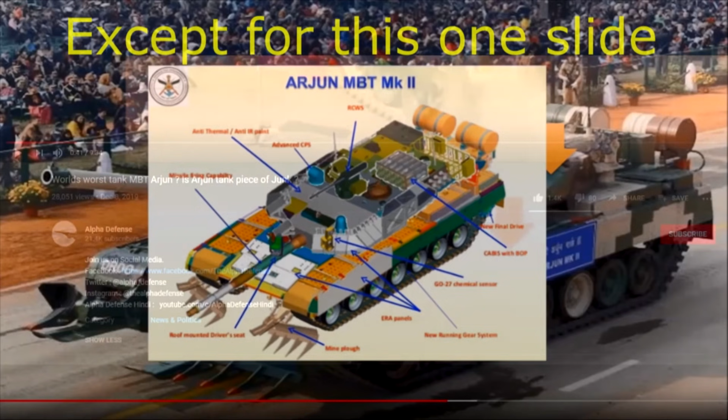Let's start with the timeline. The development of Arjun main battle tank started in the year 1972. It was right after the 1971 war, and the initial idea was to make a tank of 40 tons armed with a 105mm gun. This was the time when the world was moving towards larger guns. This was the pace of the changing world. India had to change the requirement, and thus a tank with a larger gun was designed. So the tank now in development wasn't the one which was conceptualized. Basically, it is a new tank. But the name of the project remains Arjun.

One of the most complicating factors was the changing environment, the threat perception, and advances in technology. This was a time when the world was changing very fast, especially in this segment. Between the year 1972 and 1996, the Indian Army changed its requirement 5 times. And every time there was a change in requirement, designers had to go back to the drawing board. It was only in the year 1996 that the Government of India decided to mass produce this tank. The mass production of this tank was done at the Heavy Vehicles Factory near Chennai, at Avadi. The funnier part is, the order given for mass production was just 124.

That is not an excuse for such a long development period. For example, the M1 Abrams, when first developed, had a 105mm gun mounted on it. The requirements did change, but tanks can be upgraded, and thus the tank received a 120mm gun 5 years after it was adopted. Every country changes the requirements, but the tanks are upgraded to meet those requirements. They don't go back to developing new tanks every time a new requirement is made, because the tanks are developed in such a way that they can be upgraded in the future.

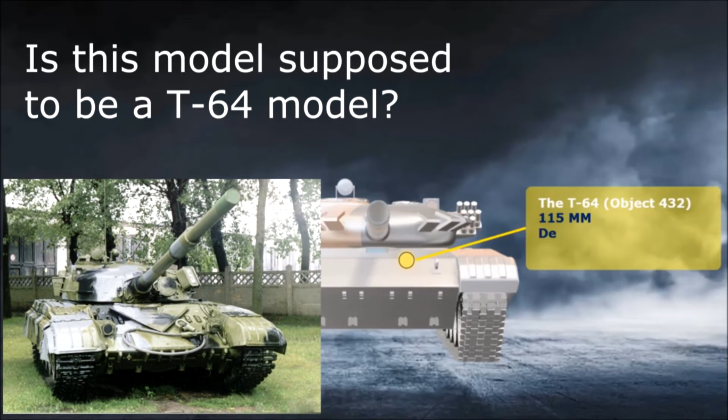The Russian T-72 tank is direct modification on T-64. The T-64 was also called Object 432. Its main gun was 115 mm and it entered production in year 1962 while the design was done in year 1951. The T-64 tank was later upgunned to 125 mm gun and with some more modification to its protection, mobility and armor, an altogether new tank was developed and this was called T-72.

Now if we apply the same logic what critics are applying on Arjun, the timeline of T-72 was comparable. So just because the name of the project remained Arjun, it is unfair to say the development of Arjun took 30 years. This is the worst possible argument you could have used.

During the T-64's development, many requirements were changed. It originally wasn't even supposed to be a tank with composite armor. It was supposed to be better than already existing T-54 tanks. But when the engineers provided the composite armor technology, the demands shifted in the direction of composite armor that would offer protection against, at the time, modern projectiles.

They also realized, during the development, that the tank could use a better gun, and the 115mm gun of T-62 was mounted just as a placeholder until the production of the 125mm gun was good enough to start mounting it on the tank. Thus, only a handful of T-64s with 115mm guns were made. Anyway, T-64 development still took much shorter than the development of Arjun.

Now about T-72. T-72 is not a further evolution of T-64. In fact, T-72 lacked a lot of things T-64 had, especially when we look at fire control system. T-72 and T-64 were developed by two completely different companies. While it is true that T-72 is based on T-64, it was made to be more simplified and more reliable, since T-64 originally had some reliability issues.

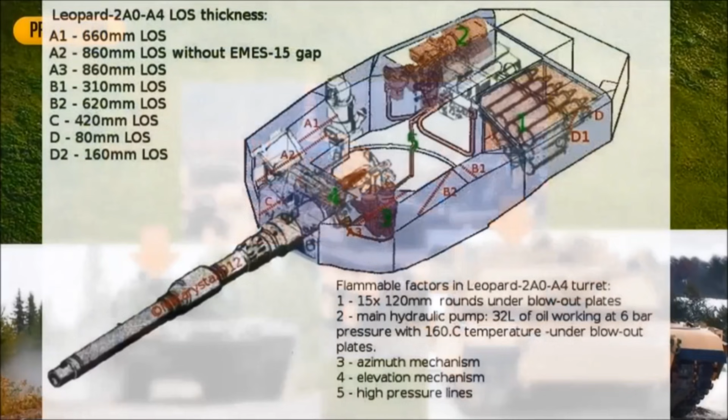The picture on the screen is the turret of a Leopard 2 main battle tank. As you can see in the picture, the mass behind the sight, which is denoted by A1 in the picture, is 660 mm. When compared to the armor on the other direction, this is comparatively lower. As can be seen in the picture, the cheek of the turret, which is A3, is 860 mm.

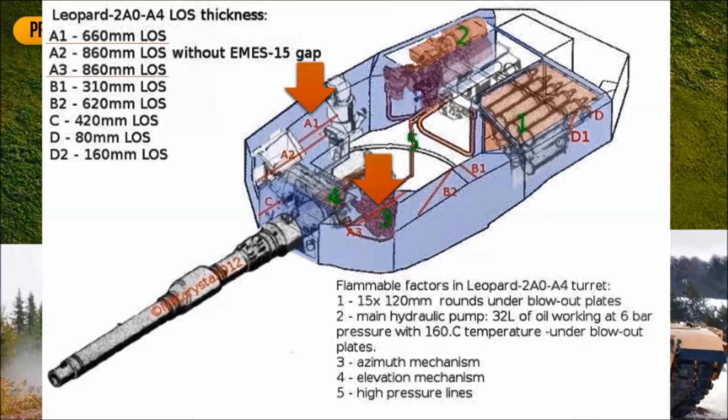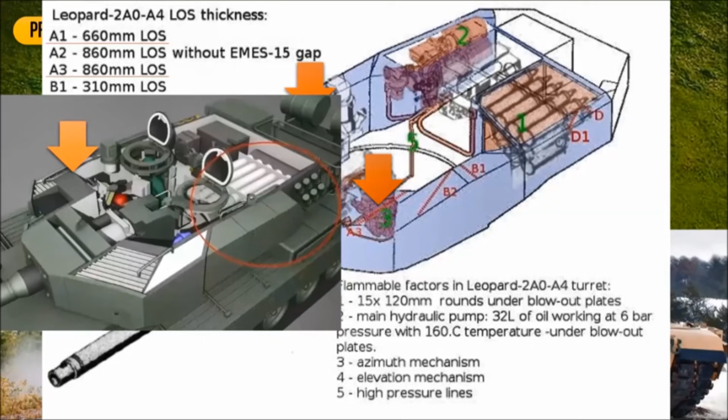The critics believe mass behind the Arjun's sight is way lesser than Leopard, and their reference is this image. This is an image of a 3D art made for a game, a non-authentic source. Here is a more accurate image of Arjun and its schematic. And it can be easily seen in this image that the block behind the sight isn't as small as it's been presented by the critics. The block behind the sight is almost equivalent to the block right behind the cheek. Thus the commander of the tank is well protected, and this thing is not a hole in the armor.

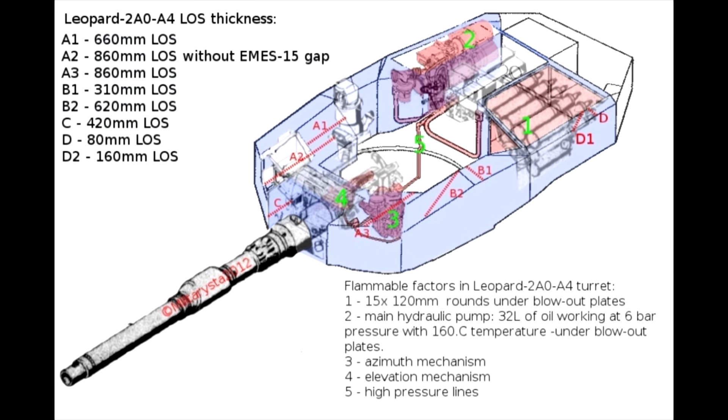Oh my god, can this video get any worse? Okay, first of all, yes, Leopard 2 does have weaker armor behind the sight than where the sight is not present, but unlike Arjun, it has an extension which at least tries to compensate for that. And don't think that the game model is the only source for that. Actual interior pictures and footage of both tanks show us that Arjun does not have the armor extension.

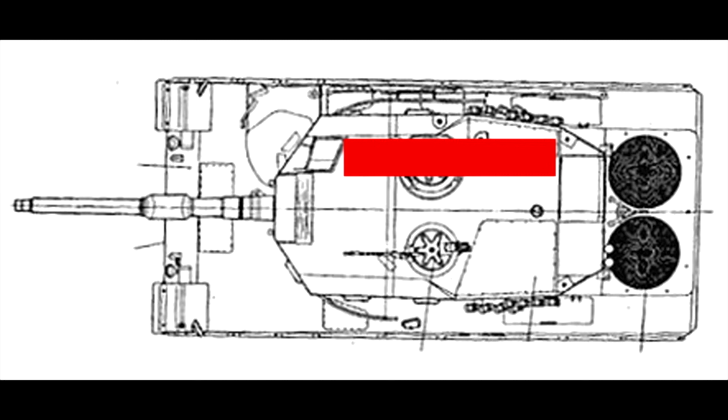The 3D art which critics are using is available online and can be bought at $164. If you wanna buy one, contact me. I can do it for you at a cheaper cost. If you're going to do it as you intended, I wouldn't even take it for free, not to mention pay for it. And another image which has been circulating across the internet... Hey, that's an image I made, yay!

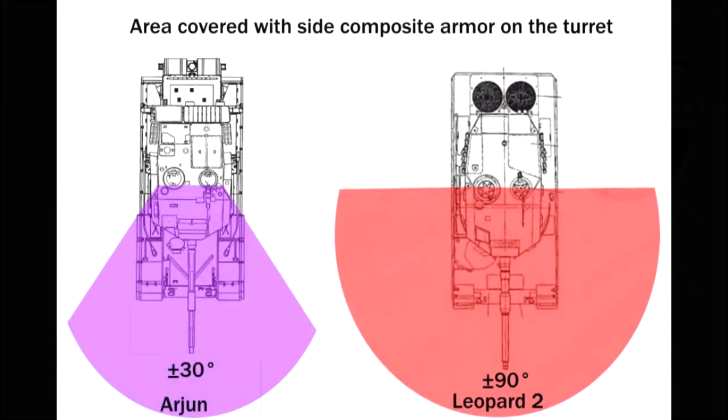...is also selective picking. As you can see in this image, it shows the coverage of Arjun's armor is just 60 degrees, 30 degrees on either side of the barrel. When this is compared, the Leopard 2 has better coverage. It has 180 degree coverage with 90 degrees on either side of the barrel. Now have a look at the arrow in the image. It shows the protection on Arjun Mark II. Yes, they have conveniently picked up Arjun Mark I and compared it with Leopard 2. Arjun Mark II has approximately 120 degree coverage on either side of the barrel.

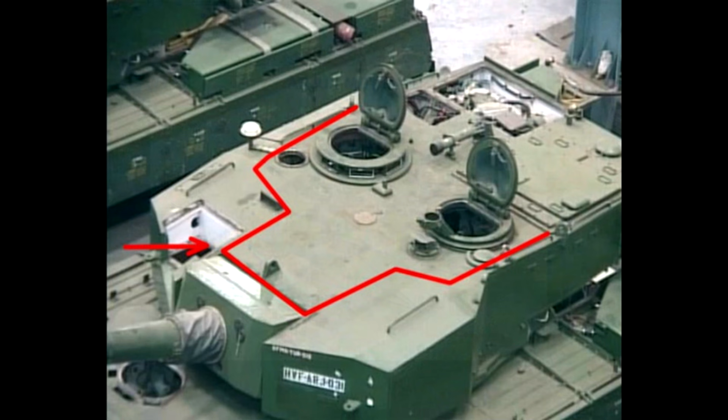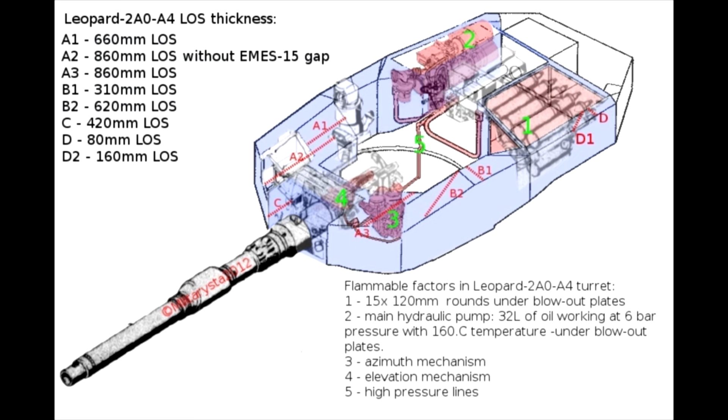Arjun Mark II still has the base armor of Arjun Mark I. The composite armor still covers only 1/3 of the turret side, and explosive reactive armor is placed on top of that. As I pointed out in my original video, those things here are storage boxes, not composite armor. In comparison, Leopard 2 has composite armor on the entire side of the turret. That is why it offers protection up to 180 degrees. If you shoot Arjun from this angle, you would have great chances of hitting the part with no composite armor, and penetrating the tank with no issues. Maybe even with World War II rocket launchers. Completely frying everything inside, since that is where the ammunition is placed, which brings us to the next point.

Arjun does not have the blast door which protects the ammo rack. Here is what I showed in my original video. That issue is the lack of blast doors for the ammo storage in the turret. If you don't believe me, look for yourself. This is how ammo storage with blast doors looks in Leopard 2 and inside of M1 Abrams. As you can see in this video, there are no doors closing or opening like on Leopard and Abrams. This means that if the ammunition gets hit, everyone inside is cooked. I don't know about you, but that doesn't sound really nice.

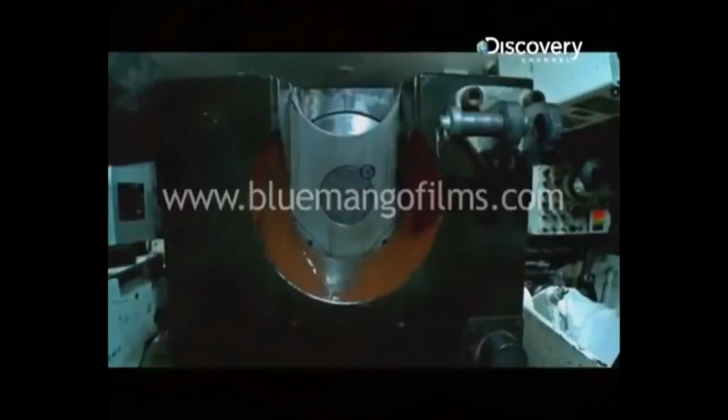Arjun, both Mark I and Mark II, appear to have the same type of protection on the turret, which looks like some blowout panels. But what's the point? If you're going to put blowout panels, you must seal the ammo rack on the inside. If you don't, fire will still spread on the inside of the tank. The ammunition inside of Arjun appears to be sealed from all sides, similar to how it is done in Merkava's hull ammo storage. But this is done to give the crew more time to escape, not completely seal the fire.

But there is one major disadvantage of this kind of protective design compared to blast door design. This only works if a single projectile is hit. But do you know what are the chances of that happening? Very, very low, because only one projectile can be ignited if it is hit directly from the back or directly from the front. But in most cases the ammo rack would be hit from the side and from different angles,

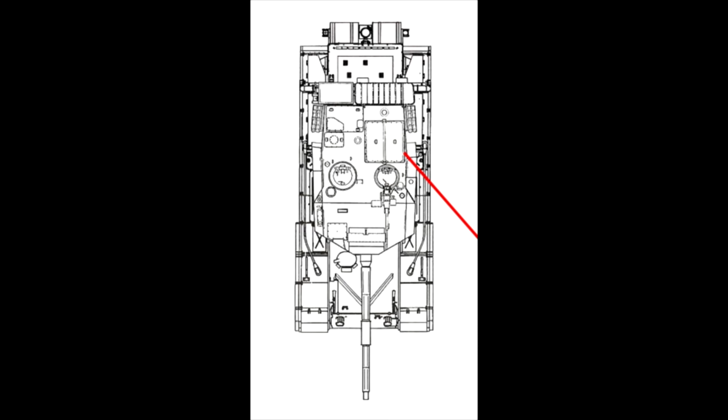which, as we previously found out, is not very good for Arjun since half of the turret's side is protected by simple steel armor. In this case, the projectile would go through multiple projectiles, breaking the protection between them and causing a big cook-off which would have catastrophic results. In case of blast doors, if multiple projectiles are hit, it will still be good for the crew because the entire ammo storage is sealed with armored doors, in which case it doesn't matter if one or multiple projectiles are hit.

Now let's come back to critics once again. They picked up this photograph and labeled the area from the sight to the gun as a weak spot. They forgot the bottom of the sight is armored. Second, which I have corrected in the video already, that the block behind the sight is not a weak spot. And third, which is the gun. In most of the tanks, gun is always the weak point, and criticism should be taken here.

In my original video, I took the entire area where the main gun sight is as a weak spot for Arjun Mark II, specifically because Arjun Mark II actually has explosive reactive armor which is not placed on that part of the turret, making the entire area a weak zone. This problem can be easily rectified, and it is seen in the Leopard 2 that this can be easily rectified with the help of a barrel skirt as shown in the image with the pointer.

Leopard 3? What? I've heard people calling MBT Revolution Leopard 2A7, but Leopard 3? I haven't heard that yet. I mean, yeah, it is a good upgrade, but as I said, the point being made is that the weak spot of the gun mantlet is further extended to the right cheek.

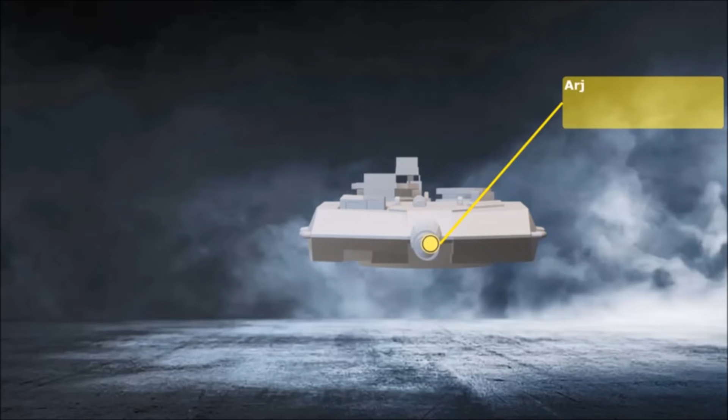Now let's move on to the firepower. Arjun is equipped with 120mm rifled gun, and many believe that rifled guns are old generation guns. Well, let's understand this. After the introduction of APFSDS round, that is, armor-piercing fin-stabilized discarding sabot, you don't have the required barrel that gives you a round of spin because the round now can generate a spin itself. But when you have smooth bore and you had to fire a round that requires a spin, especially the HESH round, high explosive squash head, a rifled gun comes handy. So rifled gun can do what a smooth bore can do, but smooth bore cannot do all that which a rifled gun can do. This adds up versatility to the gun of the tank.

What? Nice Arjun turret model, by the way. Okay, let's put all jokes aside.

HESH is not good for anything in modern warfare at all. Modern high explosive projectiles can do pretty much everything HESH can. Not to mention that the spalling ability of HESH is completely useless against modern composite armors, since the spalling would only affect the first layer out of many that modern tanks have. HESH could be made to be fired from a smoothbore gun, but the reason why it's not done is because it is useless to do it when you have many projectiles that perform far better than HESH does.

Similarly, if Indian Army decides to get more powerful armor-piercing round, Arjun can fire that. What kind of an argument is that? You can make that argument for anything. If Tula develops better projectile for T-90, T-90 will be able to fire it. That argument can be used for practically any tank in existence. The point is that what Arjun currently fires is complete junk when compared to modern projectiles.